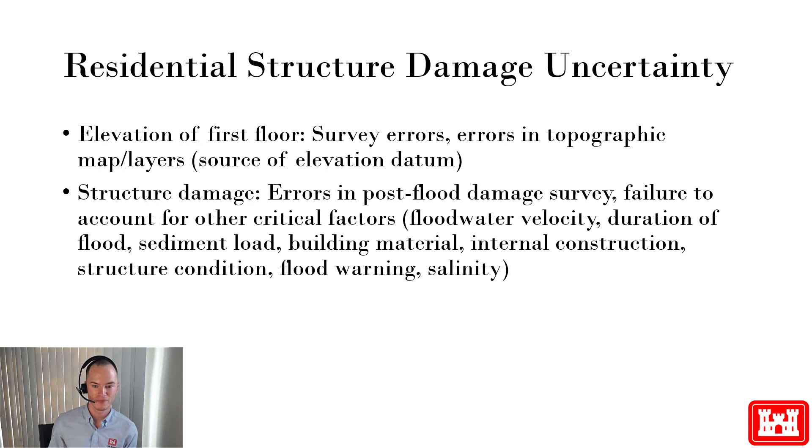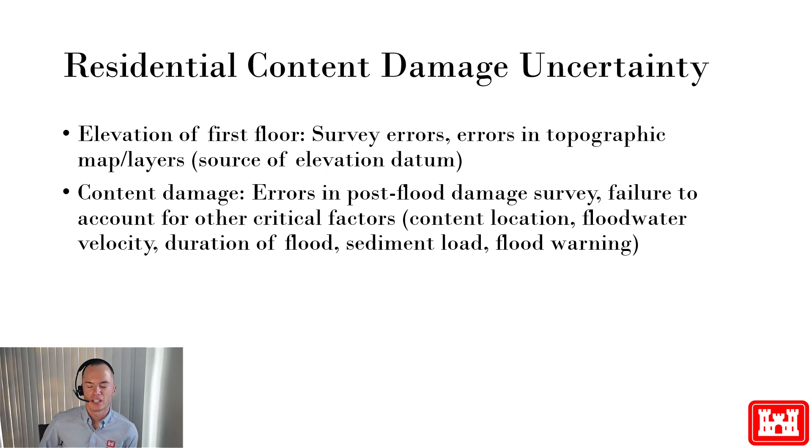The uncertainty around the damage that occurs to contents is closely linked to the uncertainty around the damage that occurs to the structure. The uncertainty around the elevation of the first floor still matters. And why might we not get content damage right? It could be due to errors in post-flood damage survey, failure to account for critical factors other than depth, and here we consider things like content location, floodwater velocity, duration of flood, sediment load, flood warning, etc.

So as we see, the first floor elevation plays a significant role in contributing toward the uncertainty around the damage that occurs at a given stage of flooding. The uncertainty is typically characterized based on the method of measurement and assigned based on the class of structure. For example, slab on grade versus raised foundation.

The table on the right is Table 6-5 from Engineering Manual 1110-2-1619. The first floor elevation error and standard deviation of error calculated from the results in Accuracy of Computed Water Surface Profiles, a 1986 study, are organized in the table. The standard deviation in the column on the right can be used to inform the standard deviation of error if using a method from this table. This work is due to be updated with newer and more accurate tools available to capture the first floor elevation.

We should keep in mind that uncertainty in the first floor elevation has a bigger impact at lower stages. In the first video of this series, we looked at the stage damage plot and saw that the standard deviation of damages increases with increasing stage. However, the coefficient of variation, that is the standard deviation as a percent of the mean, which is a relative uncertainty measure, is actually decreasing as stage increases. And this, in part, reflects the lessening sensitivity to error in the first floor elevation as stage increases.

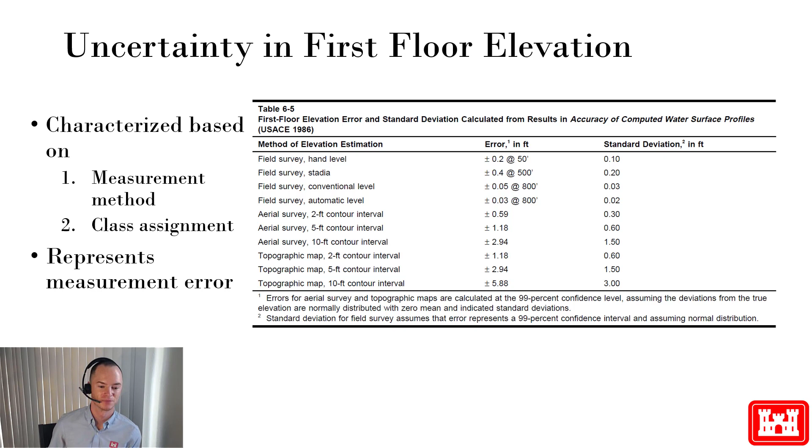When we look at a depth percent damage function, there are a number of factors that contribute to a range of possible levels of percent damage for a given depth of flooding, which are not explicitly specified in the depth percent damage function. Among these attributes, the hydrologic variables are very influential and have been organized along with their effects in the table on this slide.

Velocity is a major factor that can aggravate structure and content damage. Velocity limits time for emergency floodproofing and evacuation, and the additional force from velocity creates greater danger of foundation collapse and forceful destruction of the contents within a structure.

Duration may be the most significant factor in the destruction of building fabric. Continued saturation will cause wood to warp and rot, tile to buckle, and metal objects and mechanical equipment to rust. Sediment load can be particularly damaging to the workings of mechanical equipment and can create cleanup problems. And repeated saturations can have a cumulative effect on the deterioration of building fabric and the working of mechanical equipment.

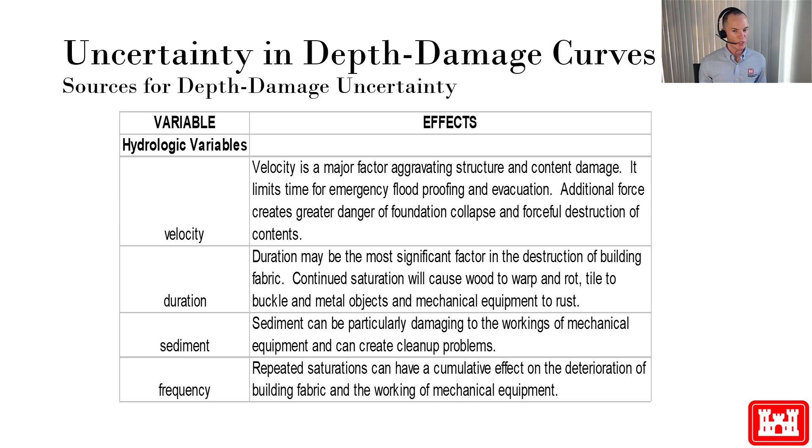Now, these four hydrologic variables are not explicitly specified in the depth percent damage function, but as these things vary with depth, we're going to get a range of percent damage.

There are a few sources for depth percent damage curves. Sources include the generic curves in the Economic Guidance Memoranda, such as Economic Guidance Memorandum 01-03 and Economic Guidance Memorandum 04-01, the FEMA HAZUS curves, and the depth percent damage curves developed in district offices. The key is to be able to specify a range of percent damage for a given depth and motivate why a given function applies for your study area.

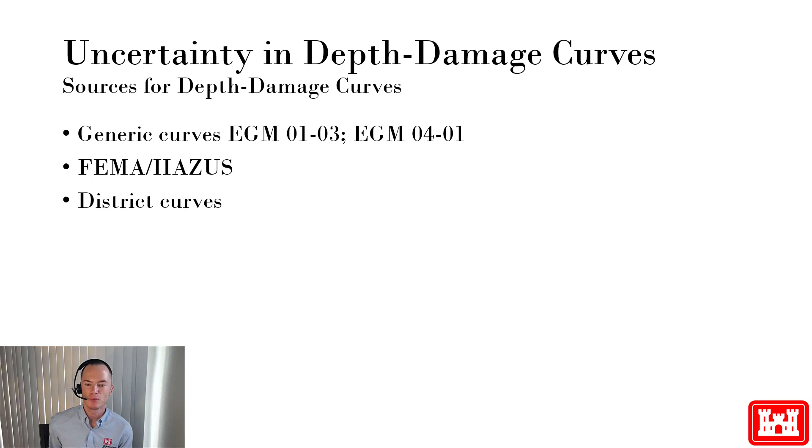From Economic Guidance Memorandum 01-03, this is the generic depth percent damage curve for content of a one-story residential structure with no basement. The same bounds are plotted with approximately 5 to 10% content damage for a depth of flooding at the first floor elevation, and approximately 35 but less than 45% content damage for 11 feet of flood depth above the first floor.

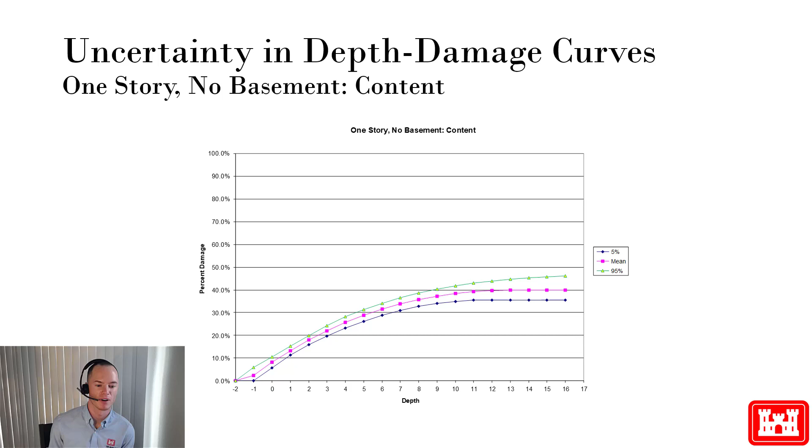Sources for commercial and industrial depth damage functions are more limited than for residential. One option is the non-residential flood depth damage functions derived from expert elicitation, a 2013 IWR report. The large variety of commercial activities makes generalizations and therefore depth damage functions difficult. There is significant potential for large residual errors in the estimates, and content is highly variable.

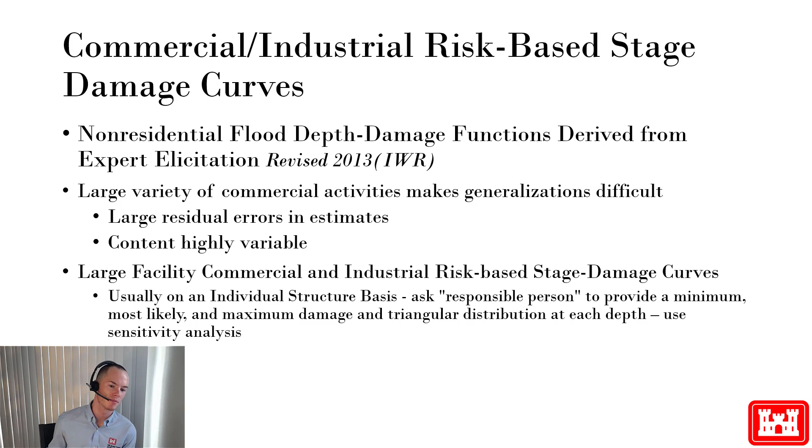For large facilities, commercial and industrial risk-based stage damage curves may be entered directly, but this is usually done on an individual structure basis. You can ask a responsible person to provide a minimum, most likely and maximum damage to characterize a triangular distribution at each depth and carry out sensitivity analysis.

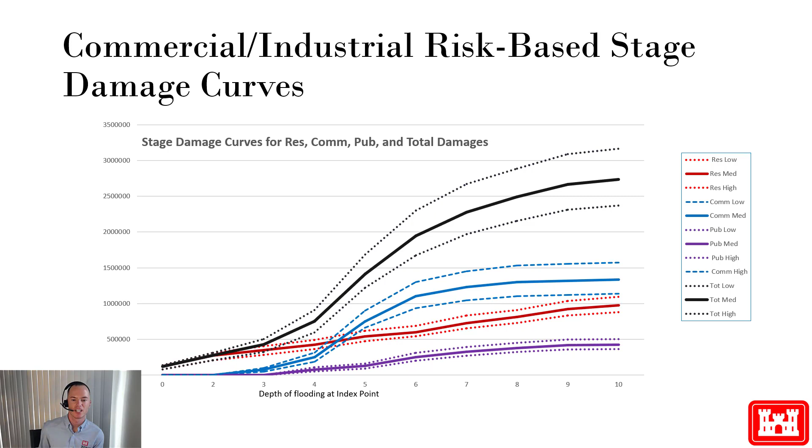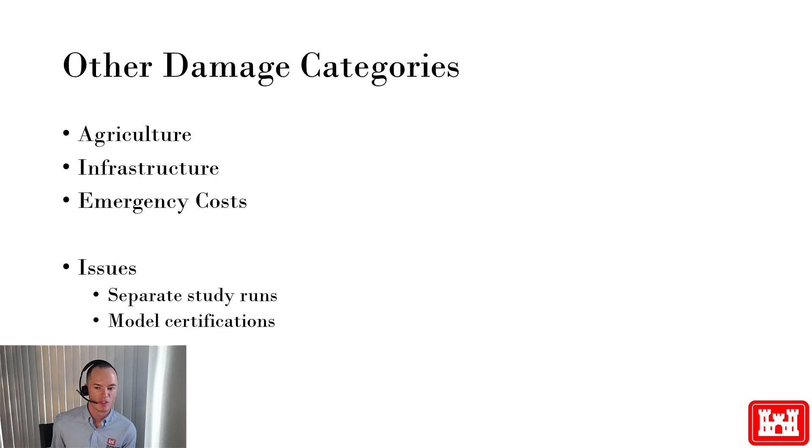There are damage categories other than structure and content damage. These damage categories include agricultural damage, infrastructure damage, emergency and cleanup costs. And these other damage categories often are estimated outside HEC-FDA, although in some instances can be specified within the model. Other categories usually don't add too much in terms of benefits and can be difficult to estimate.

How do we reconcile our requirement to characterize uncertainty with our requirement to be compliant with 3x3x3? We can use existing data, expertise, and experience to help reduce uncertainty. Each of these helps us to characterize the possible range of values for the parameters that feed into the stage damage function. The remaining uncertainty is addressed by making assumptions. Assumptions are significant and can have a big impact on the analysis.

We must document all of our assumptions in the report. Reproducibility should be the standard of our work. Include justification and rationale for every assumption. Finally, risk-informed decision-making is more than just schedule and funding, but also a consideration of the risk of not selecting a reasonable plan, a plan that meets federal interest and is functional.